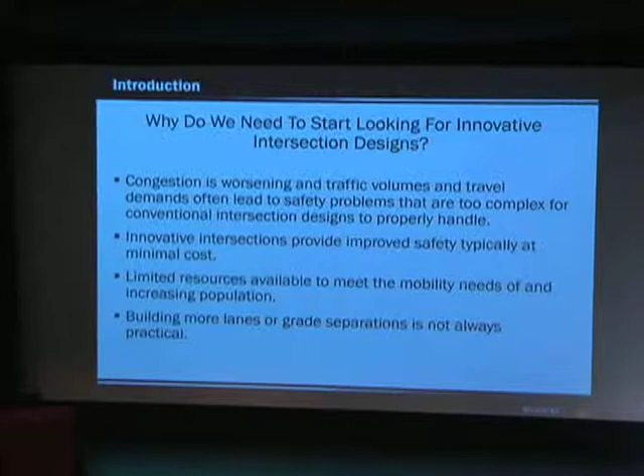The second part is we don't have that much money. We have Prop 1 coming, hopefully Prop 7 will go through. Those are good chunks of money, but not enough to solve every situation out there. So we have to look at the best way to use our money and save the big money for the projects that really need it with direct connectors.

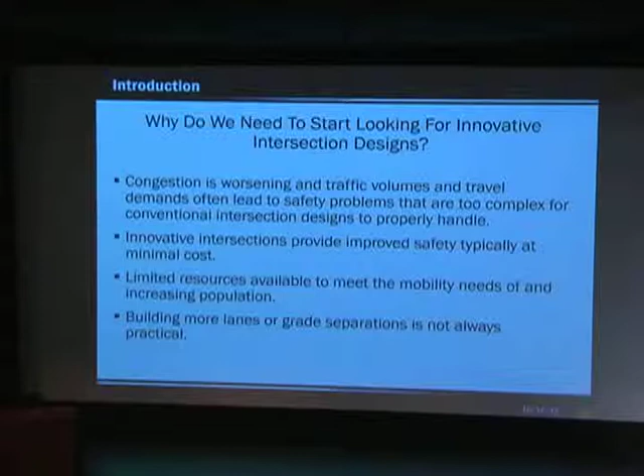There's one thing that all innovative interchanges have in common, actually three things. You get fewer conflict points when you implement one, you get significant before and after crash reductions, and that leads to better safety. You also get reduced delay and reduced congestion, which is key to mobility. And then typically less right-of-way needed, decreased construction cost, and quick implementation—that's really the value, the best bang for the buck.

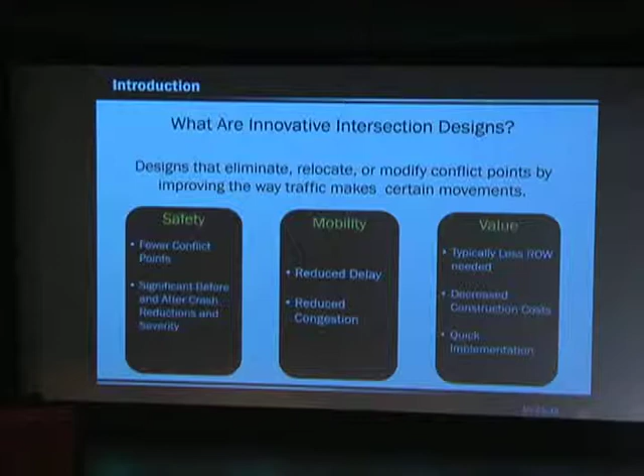What they do is eliminate, relocate, and modify conflict points by improving the way traffic makes certain movements. We're certainly going to list a few here. This is straight off of Federal Highway's guidance on innovative intersections, but we're not going to talk about all of them because we'd be here all evening.

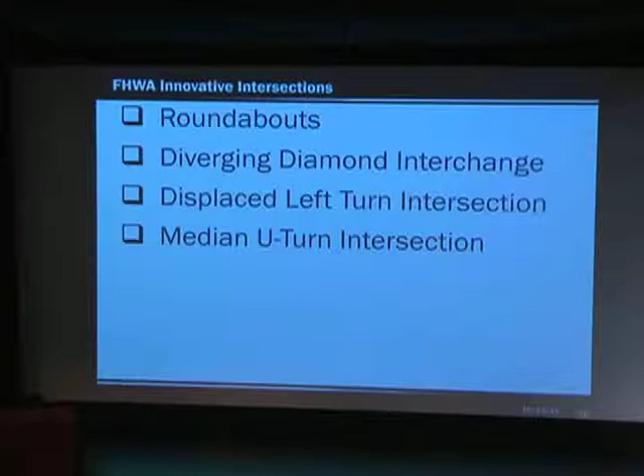So what we've done in the El Paso area is we've actually done the first two. They're implemented: the modern roundabout, we have several locations we'll go through throughout the city, and we also have a diverging diamond interchange. The bottom two, displaced left turn intersections, also known as continuous flow, and the median U-turn intersection, those actually aren't in the El Paso district, they're in the El Paso region.

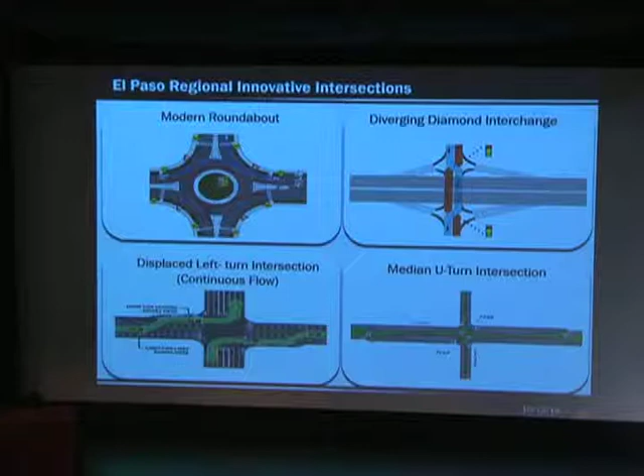Our sister city, Ciudad Juarez in Mexico, has actually implemented these two types of interchanges. So it tells you funding is not just a problem here, it knows no borders, it crosses over—if you think we have funding issues, there are some issues in Mexico to fund their projects too.

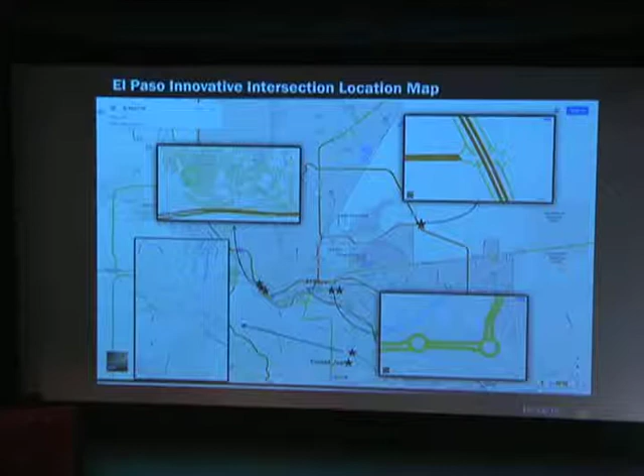Here's a location map of El Paso. If you've ever been there, or want to go visit these projects, you'll find to the upper left of the screen we have 3 roundabouts located along the university perimeter, University of Texas at El Paso. Then to the bottom right, we have a double roundabout already in service, in central El Paso. To the top right, we have a double diverging diamond interchange in far east El Paso. And to the lower left, the 2 innovative interchanges in Ciudad Juarez, Mexico, across the border.

Okay, so if you're the Griswolds, you had a hard time trying to get through that—that's not a roundabout, that's a rotary, and that's totally different than a roundabout. Roundabouts are actually pretty easy to get around, and even if you're Chevy Chase, you can do it.

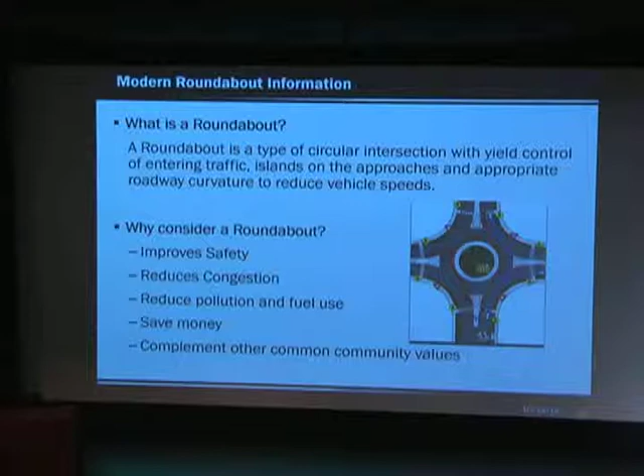And there you have some of the considerations for a roundabout listed below, and we'll go through each one of those one at a time.

And to top it all off, those conflict points on the roundabout are glancing blows because you're going in the same direction of traffic. So you reduce your head-on collisions, and you virtually eliminate T-bone type crashes. That's really the biggest benefit, just reducing the conflict points.

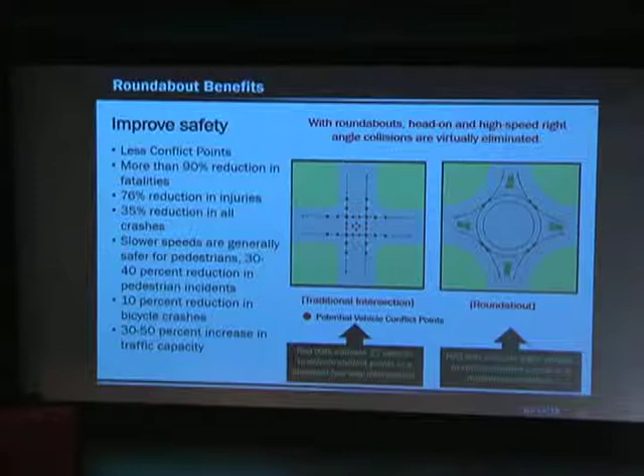The other thing communities have found very interesting is that you can make it part of the neighborhood, and incorporate some aesthetics into it.

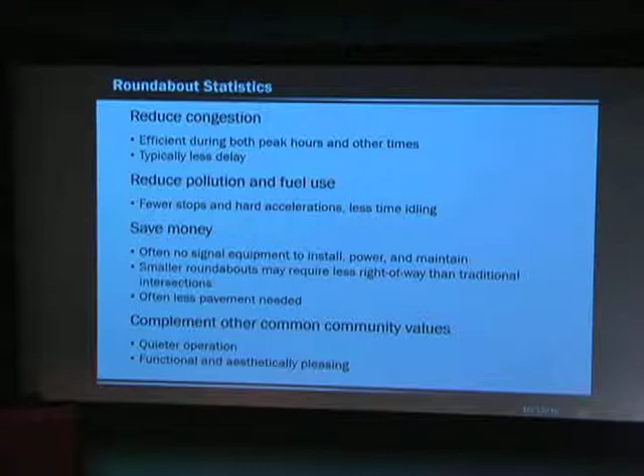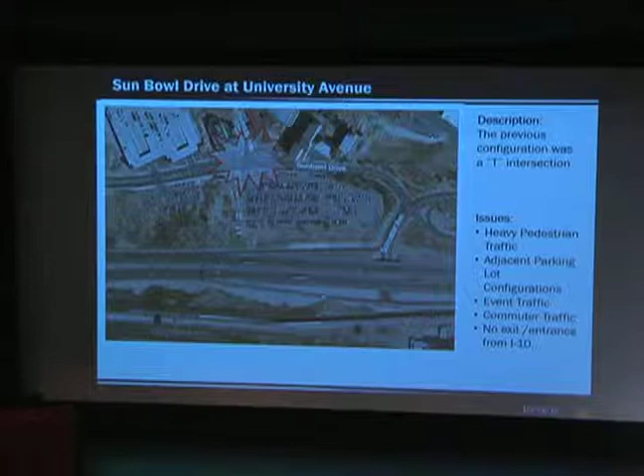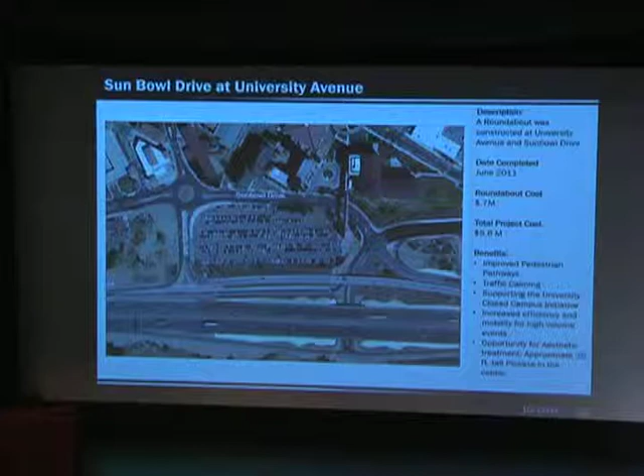I want to point out here that you can see a lot of parking lots, and a lot of pedestrian traffic that can be generated from those parking lots. Pedestrians are not an issue for roundabouts.

Here you see a nice shot of the roundabout. If you note the crosswalks here, they're set back a little bit from where you merge into the roundabout, and that's intended to give the vehicle time to stop in front, while the pedestrian can actually cross in back of you, so there are no surprises. The vehicle behind will obviously see the pedestrian in back of the other vehicle.

Here you see what they call a splitter island, and as you can tell it has some geometry embedded in it, so it guides you in the right direction. You're already steered towards that direction - you're not going to make the bad move. Of course, you can't eliminate everything, but for the most part you've eliminated a wrong turn.

As far as aesthetics, the roundabout lends itself to that. We did not do any of the aesthetics that you can see on these projects - what happens is the community finds it really interesting, and they like to incorporate what fits best with stakeholders in the community and area. In this case, the University of Texas El Paso put in a giant pick.

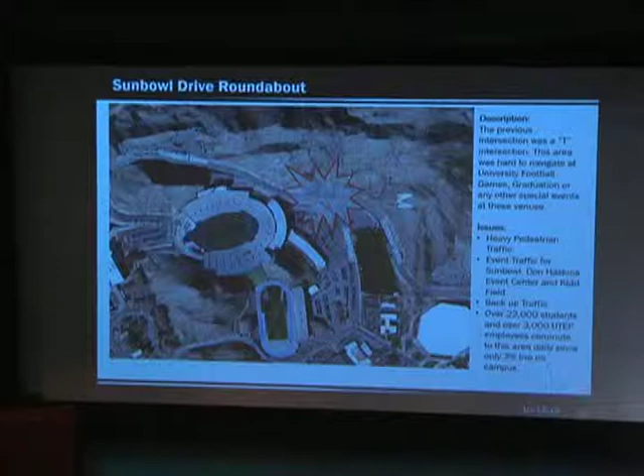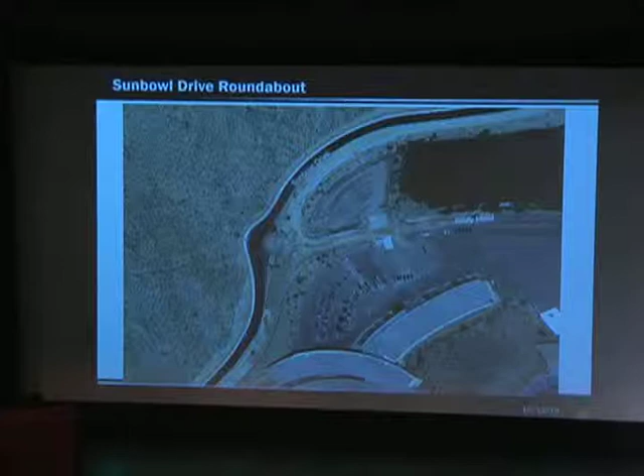So we proposed a roundabout. This is one halfway done, so you can see some of the construction phasing. Our area office did a great job keeping traffic moving during some of these events that still had to go on, and then it's completed.

Again, here you see the same splitter island. The general diameter for a multi-lane roundabout is about 180 to 220 feet. It can grow larger depending on how many legs you have in the roundabout and the geometry coming in. As you can see, it's pretty free-flowing. The pedestrian traffic here, the university had their own bicycle and pedestrian plan, so you're not going to see crosswalks here, which makes it more efficient, since the crosswalks are up here and down here leading towards the entrance to the Sun Bowl. And of course you can see they incorporated another art piece in the center.

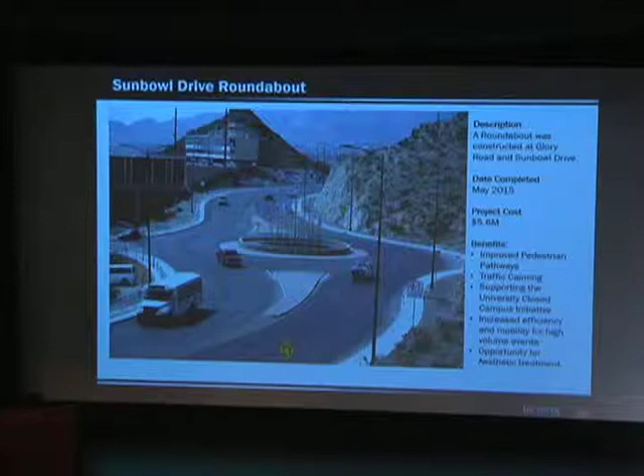We got a little bit bored with just two regular roundabouts, so we decided on this third one. There was no intersection there, but we had a spur, 1966, going in that was going to connect Schuster Avenue to a parallel roadway, US 85, off the screen. It was going to connect here at a really bad curve.

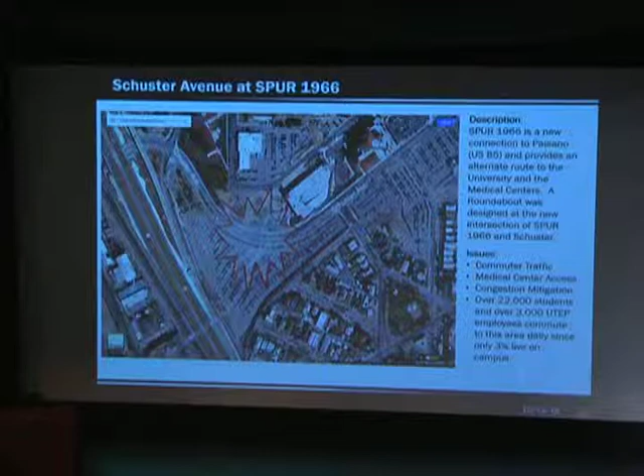Again, you can notice all the parking areas. UTEP is a commuter school. There are a lot of people who drive to the university, and so this is, of course, going to generate pedestrian traffic trying to get onto campus.

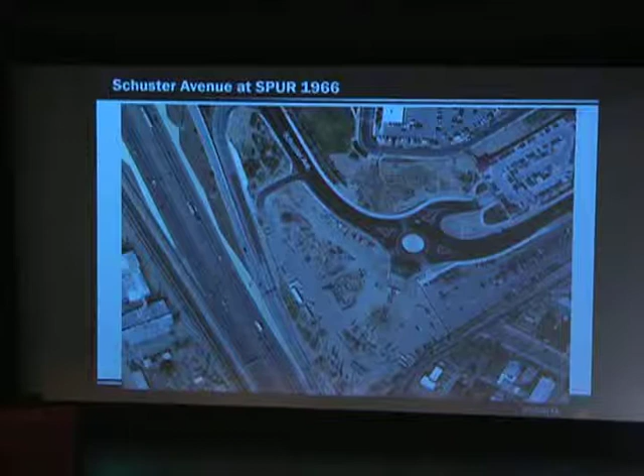You enter here, you exit here. If you need ADA facilities, you can go onto this parking garage, which has an elevator, and you can cross right here. If you don't, there is a staircase up through the mountain and you go onto campus. So, a very clean design with pedestrians and vehicles.

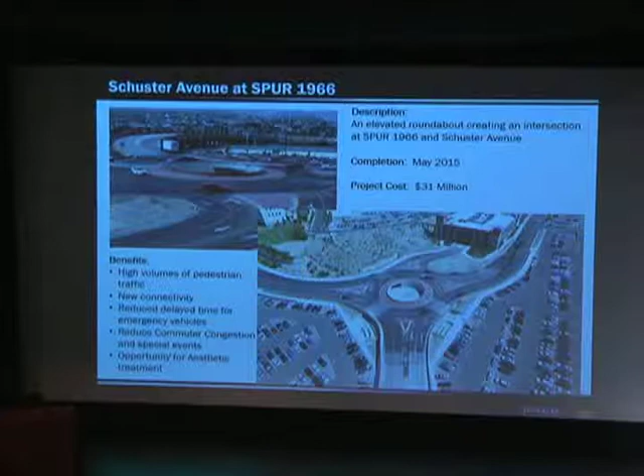On the bottom here you have this, this is actually a rendering, and it's pretty close to what we built. I mean, it's almost identical. So again, technology helped us visualize it and helped us go out to the public. Here's what you see today. Of course, the university does have plans for another art piece. We're looking forward, I think. I'm not sure where my boss is, but we're looking forward to see what's going to show up there.

So here's a double roundabout. This is in central El Paso. Jorge alluded to, I guess, a double tier. We do actually have a double roundabout already in service in El Paso.

So this is the intersection before. If you note on the top, I put question marks, I didn't know what to call it. I think it's a 5-point intersection with a bypass and frontage and multiple driveways along that area. But what I do know is it's very confusing to traffic and it's very difficult to sign. So we had to come up with a better solution.

We had a project going in there that was about to just replace everything the way it is. We didn't think that was a good idea, so we worked with some other districts, San Antonio helped us out a little bit, and did some brainstorming.

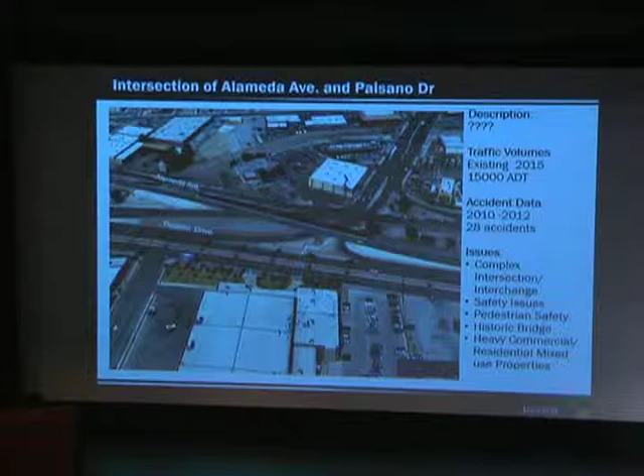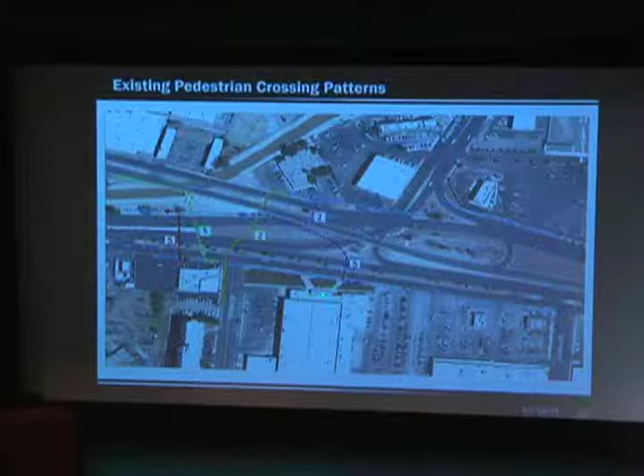This is what was happening: there's no way to get across that big mess, so people are just crossing all over the place.

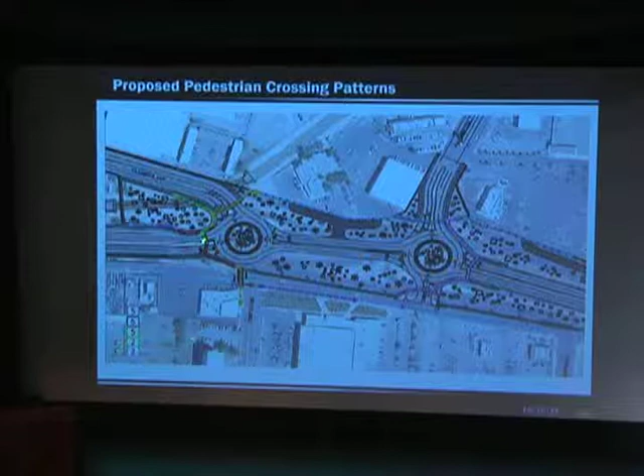With the double roundabout, we were able to solve two things. We solved the confusion - although you might think this is confusing, it's really not. And with pedestrians, they now had a clear path to cross. Pedestrians typically cross at the entrance of the roundabout, so we put in a pedestrian rail and guided them towards those areas, so everybody goes to the shopping area and fast food places. It's a lot more organized than before. You don't want pedestrians in the middle of it, though every once in a while you'll get one out there. But for the most part, everybody follows the paths we've set out.

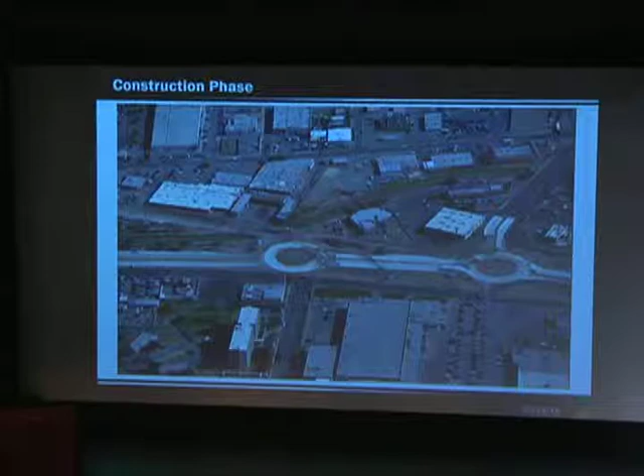We got over that with the help of renderings, 3D models, and 3D animations. Our Office of Public Involvement - Jefferson Grimes, if he's here, thank you so much - they put out some PSA videos, worked with us, and we sent those to the news stations and had them at our meetings. I don't know how many, we probably had 20 meetings with city reps and their communities. It was not an easy process, but we got through it.

So here's the finished product, an actual aerial. It looks a little colored in, but this is actually what's out there. As you can see, we had a big footprint - we didn't need any right-of-way, no right-of-way cost. We were able to put in some really nice pedestrian areas, 10-foot sidewalks that a bike and a pedestrian can share, and different ways to get to the retail places. The best thing overall, we solved the traffic problem. Congestion is no longer there. Confusion - maybe a learning curve, I wouldn't call it confusion - but that's no longer there either. We're able to get a lot of traffic through this intersection now.

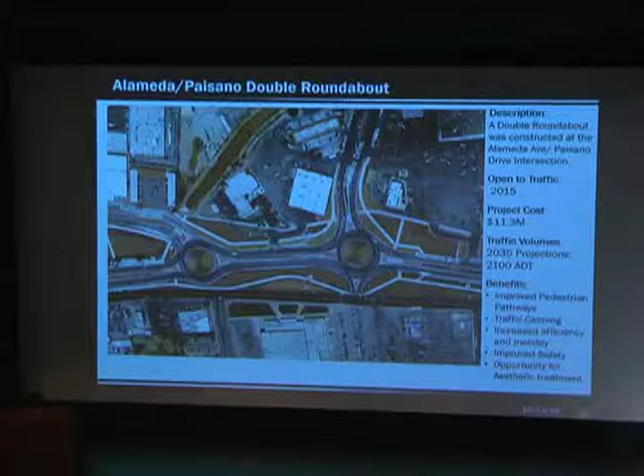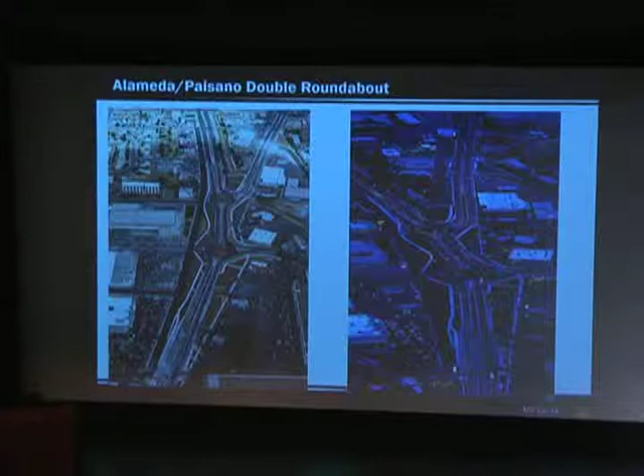Just want to show you an overview. The Texas Tech Medical School is up here. They're creating a walkable type campus, so we think it goes really well as it connects to this neighborhood over here. Since we've put it in, we have not had very many complaints. There has been a learning curve. Some of the retail was not quite thrilled during construction. Our area office worked that out, and we finished it up - it's open 100% to traffic right now.

Made a little video, if you can push play up there.

So other than the cheesy music, it went pretty well.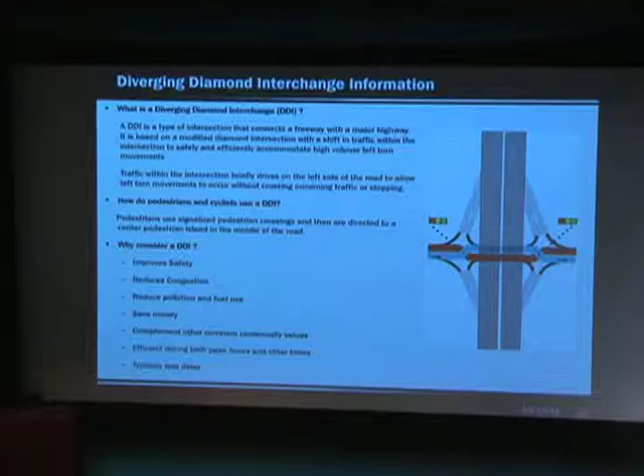So then we were done with roundabouts for a while, but we wanted to try something new. We had another location on East El Paso that had some issues going on, and we thought a diverging diamond interchange might be appropriate. So you ask, what is it? A diverging diamond is a type of intersection that connects the freeways with major highways. It's based on the traditional diamond interchange - the only difference is you're flipping traffic, crossing it over at the intersection. So for a little while, about 400 feet, you think you're in London, kind of like the Griswolds. But it has the same effects on points of conflict.

Again, the way it improves safety is by reducing points of conflict. On the left, you're looking at the points of conflict for a traditional diamond interchange, and on the right, a reduced amount. It's not quite as few as the roundabout, but when you compare - I think it's 26 here on a traditional versus 14 on a DDI - you've made significant reductions in conflicts, and that means less accidents. It does get rid of through traffic, but since this was a diamond interchange with no frontage roads, there was very little volume going through, one or two a day, so that wasn't a big factor anymore.

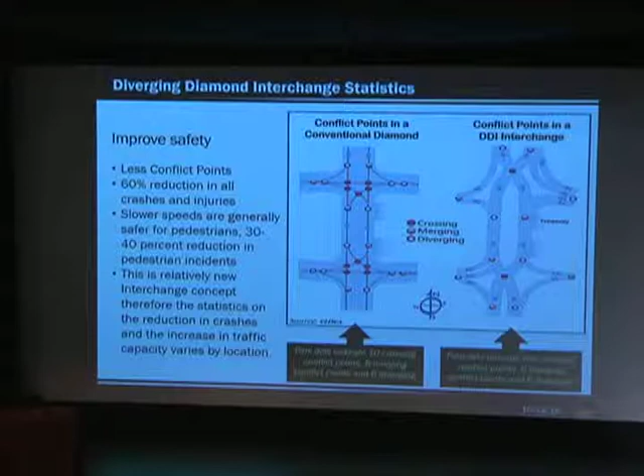What it does do is direct you so you don't go the wrong way, in the wrong path, and you'll see that in some of the pictures. It reduces crashes and injuries by 60%. Again, slower speeds, just like the roundabout, and it's a pretty new concept in intersections these days. It's already on Google Maps - if you look it up, that's what it looks like.

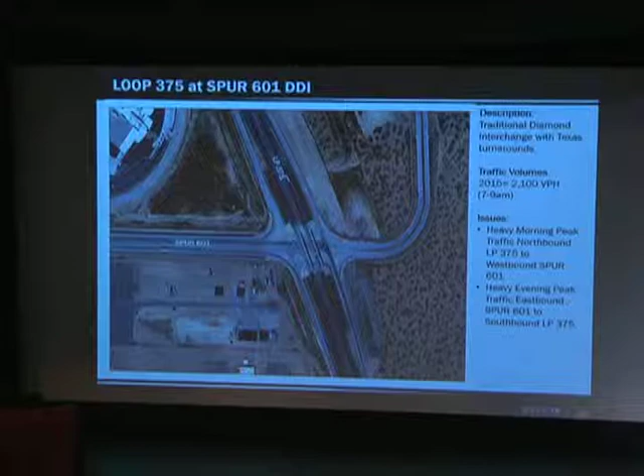It's a 3-span bridge, center span about 130 feet, type 4 beams—we have that all over the state. We were able to overlay the pattern with the right geometry. Really all we did was remove some raised median, add some raised median, and add some barrier in the center.

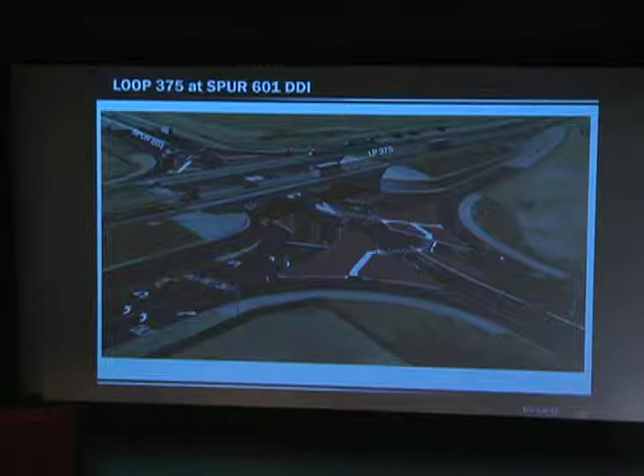Total cost less than $1 million, and we have 2.5 times the capacity now through that interchange. We don't get backups onto Loop 375 anymore. So best bang for the buck, not too bad for left turns.

DDIs are relatively new. The first one was in Springfield, Missouri, sometime in 2009. Ours was in 2015, the first in Texas—I know Austin's working on one, but we got it first. It's the 38th in the nation; there's about 58 in operation to date. There's a website, divergingdiamond.com, that tracks all of these, and we're listed there as number 38.

The great thing about this one is because we retrofitted it, it's the only one in the world that has Texas turnarounds. I don't think the Austin one has that, but they might add it now. We left the Texas turnarounds in there and haven't found any issues—it actually takes out some people who may want to make a U-turn, taking them out of the queue, so it works well. Hopefully we'll keep that record for a while.

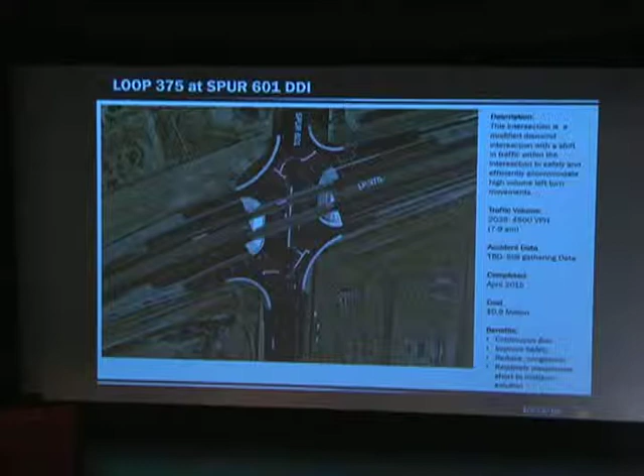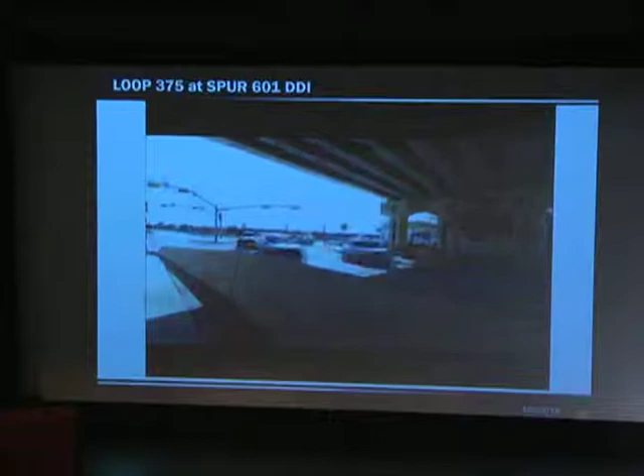We made another video here, probably the same cheesy music. These are the traffic cameras—we just wanted to see what it looked like at night and see what visibility was. This was not peak hour; this is more like peak hour. The video is at a little bit faster speed, just to give you an idea of what it is.

In Mexico, they're strapped for money, just as we are sometimes, and they found a creative way with no money to get more traffic through their intersection. I don't have a lot of detail on this one, but Federal Highway does have some really good guidance on it.

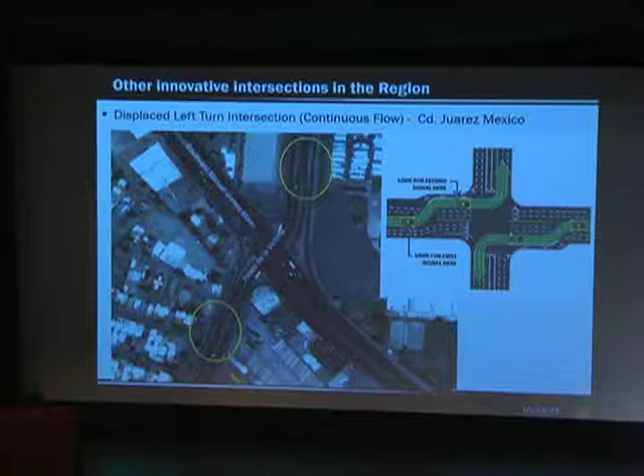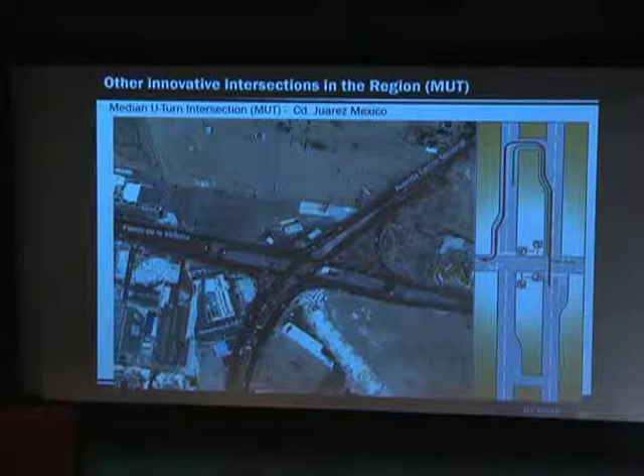So again, some international flavor—they're looking at things that we're going to start looking at too, trying to find some suitable areas to implement these and some other innovative intersections.

If you leave with anything you learned here, it's extensive public outreach—you've got to have it. If you can't convince people, it's not going to happen. Invest in renderings, that's part of the public outreach. Don't penny pinch it; you'll save a lot more money on the intersection than you will on making renderings.

Education for drivers and pedestrians. Our OPI office has always been helpful to us—they're there to help you come up with these PSAs. Positive publicity, push all the positive points, less conflicts, less conflicts, and I think you'll get through to the community. The last one's pretty important: make sure you do clear and concise signing and striping. That's the way you're going to get through this.

And that's all I have today. If you have any questions.